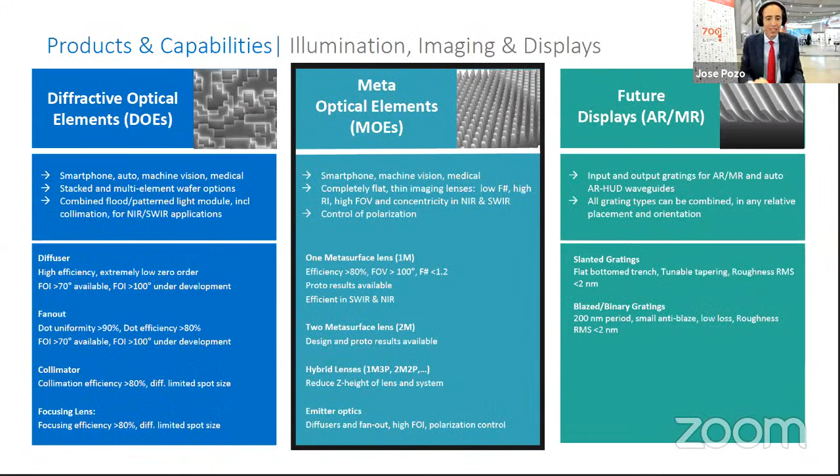Hello, I don't think we can hear you. Sorry for the delay here. Thank you for the introduction. So NIL Technology have 3 different product categories. We have the diffractive optical elements, we have the meta optical elements, and the future displays. And today I will talk about the meta optics.

So what is it that is exciting about meta optics? If you think about a classical imaging system, you typically have a lot of different refractive lenses, and you need many lenses in order to make a good imaging system. But with meta lenses, you can do with much fewer elements. It's even possible to make a camera with a single meta lens and a sensor. And this simplifies integration. It's also a very high thermal stability of the meta lenses compared to a refractive lens in glass.

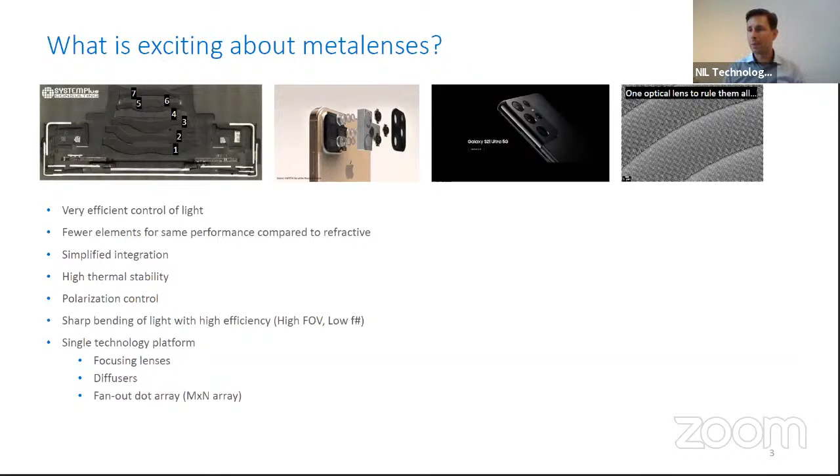With meta lenses, you can also control the polarization, which opens up for making completely new functionalities. A meta lens can completely replace a fisheye lens, so it's possible to make a flat optic that has a field of view that approaches 180 degrees. And all of these different types of metalenses are done on the same platform, so you can make focusing lenses, diffusers, and dot arrays with fan outs on the same technology platform. Here is an example where we have made a camera consisting of a single meta lens and a sensor.

And then we compare it with a 6-piece system, so 6 refractive systems and a sensor, and you can see that the image quality is comparable. So it's quite amazing how much the metalenses can accomplish with a single surface.

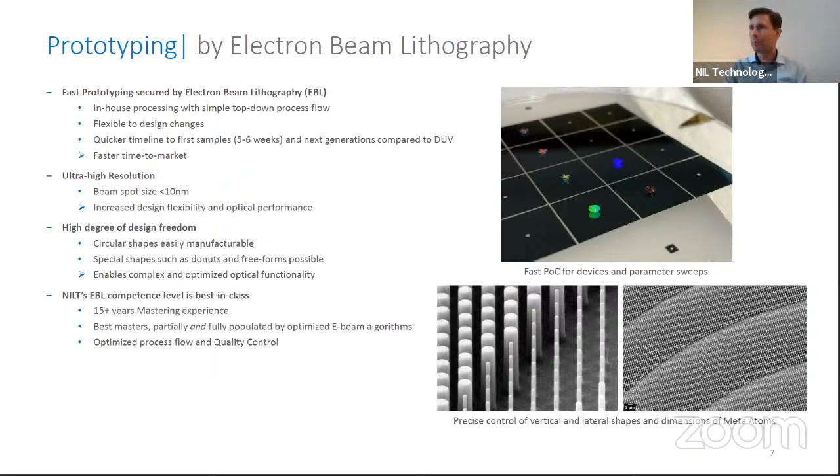For mass production, we utilize the precision of e-beam for making nanoimprint masters. We preserve the accuracy from the master when we replicate it with nanoimprint lithography into a resist layer. After it's imprinted, we do a pattern transfer etch into the silicon, and then we've replicated the metalenses. This process is highly scalable and helps bring down the cost per element. There are no constraints on material composition of substrates or coatings, such as anti-reflective coatings and apertures, and it's possible to reach high efficiencies - we've demonstrated more than 85%, and we're getting better and better.

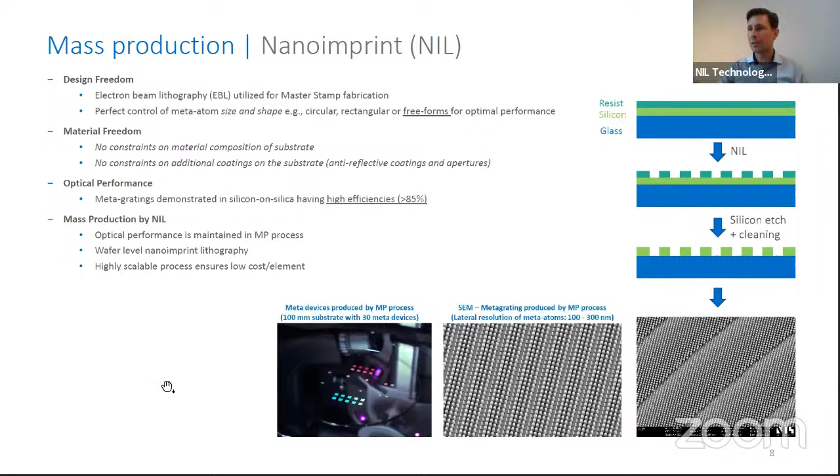The way we work is we start with design, then we have the build, which for the prototyping phase is the e-beam process I described. After the build, we do structural analysis, looking at SEM and AFM to see how the pillars come out, and do statistical analysis. We also look at optical performance, and we can completely link any deviations in manufacturing to the optical performance, meaning we understand how structural deviations affect it. Then we can make corrective actions and tweak the design to improve efficiency or performance, spinning this wheel quickly for prototyping - with a turnaround of around 6 weeks.

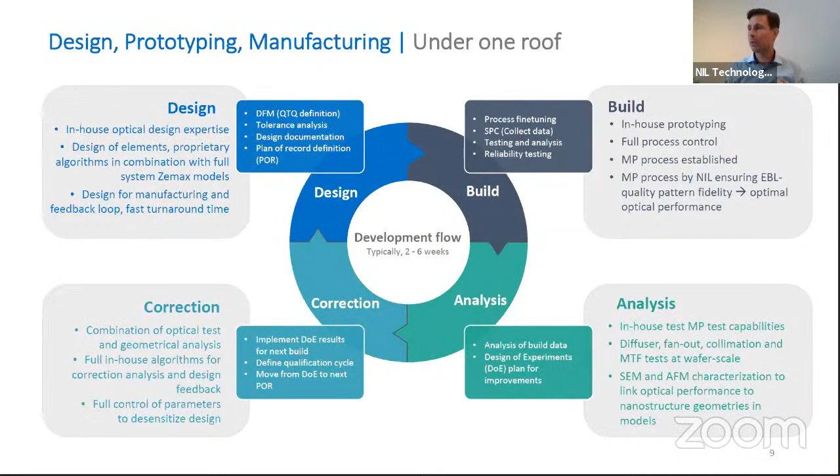Then for the mass production process, we make a fully populated master that we replicate. That is the end of my talk today.

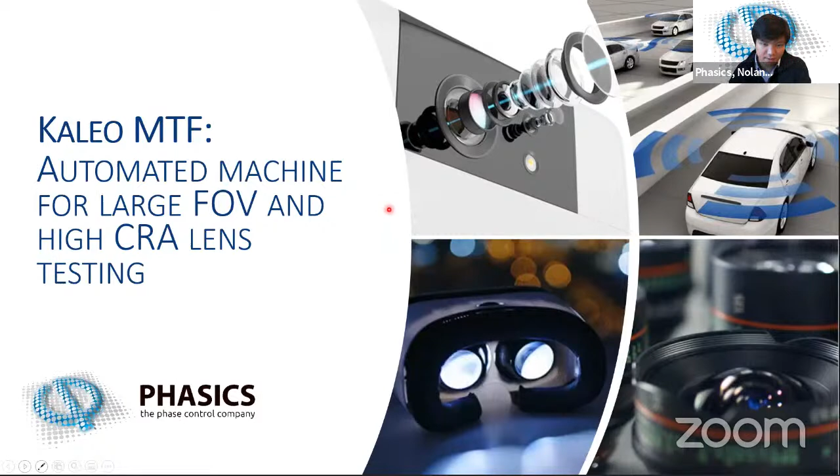Today I will present Kaleo-MTF, actually the new version of Kaleo-MTF, which is our automated machine for high CRA lens testing. But before that, I will go over a couple words about PHASICS. PHASICS is a French company that was established in 2003, with about 40 employees. Our main focus is designing, manufacturing, and supplying high-resolution wavefront measurement equipment from deep UV, so 190 nanometers, to 14 microns. All our main products are based on one technology called quadri-wave lateral shearing interferometry, which is a specific wavefront measurement technique.

So here we have an example, actually a quick overview of the different products we have. We start with the core of all our products, which is the wavefront sensor and the wavefront sensor technology. We have two examples here: one is a visible wavefront sensor with high resolution, and another one specific to microscopy imaging, which we can use a lot for meta-lens characterization. Just to give you an idea, our typical products can reach up to about 800 by 700 measurement points on the phase map.

To make a measurement, we also developed accessories to couple with the wavefront sensors, like here, which is an R-Cube illumination module, so that we can provide everything from the wavefront sensor to the source, to have a high quality beam that can go through your optics, and then we use our sensors to analyze what is transmitted. We also have, for more integration, different accessories to couple with these elements: the wavefront sensor, the R-Cube module, optomechanics, and different optics to shape the beam that goes out of the R-Cube. That can be converging, diverging, or a really large and high quality collimated beam.

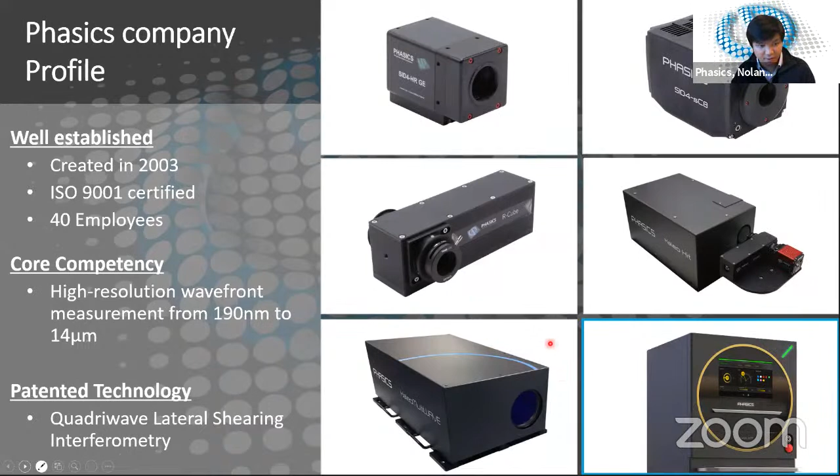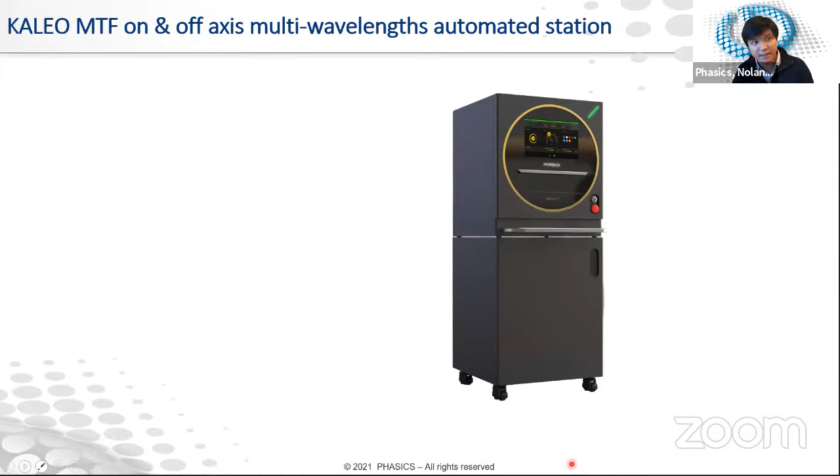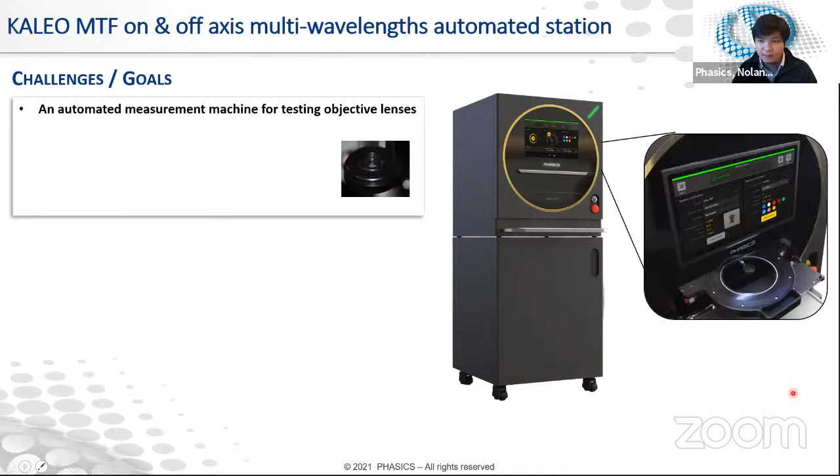What I will focus on today is Kaleo-MTF, which looks like that, and also like that in full size. The idea of Kaleo-MTF is to characterize objective lenses, so imaging optics, automatically. What kind of optics do we measure? They're actually quite small, as you can see the actual scale here. It can be smartphone lenses, automotive lenses for autonomous cars, meta-lenses, or more specific lenses.

The idea is really for us to measure high-end and high-performance lenses, because typically what we have now, as was mentioned just a few minutes ago, the devices are going smaller, and smaller means more CRA, so higher angles to aim for the edges of the sensor. You have high NA for more resolution and more pixels for better images. You have a wider field of view to see more with fewer devices. And something that has been quite a headache for recent developments is nonlinear CRA evolution, distortion, etc. across the field that can be hard to measure. We really focused our development on these hard-to-measure lenses.

So what do we do exactly for these lenses? We measure, for up to 8 different wavelengths in the visible and near infrared, different parameters: the OPD, which is directly the wavefront information, the optical aberrations, the MTF, which is the imaging quality, and some geometric parameters like EFL, F number, field curvature, etc. The idea of the whole system is to give as much information as you can with a single machine and a single measurement.

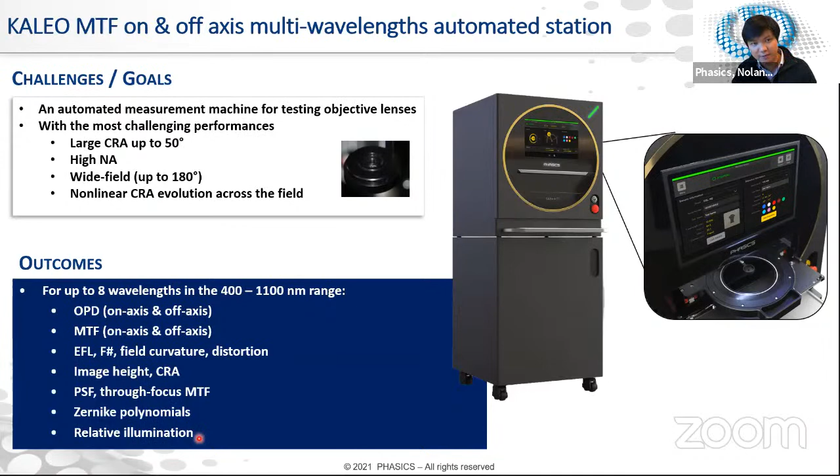The specificities of our machine is really to have a fast and fully automated measurement process, a quick setup with no alignment. You simply need to place the sample inside and you will have all the measurement.

You can customize the measurement sequence. You can choose the wavelengths, the angles, the azimuths that you want. All the results are basically in wavefront, and we can change the plane where we analyze the wavefront, so you can really compare to the design that you have. And we, of course, have accurate and reproducible measurements.

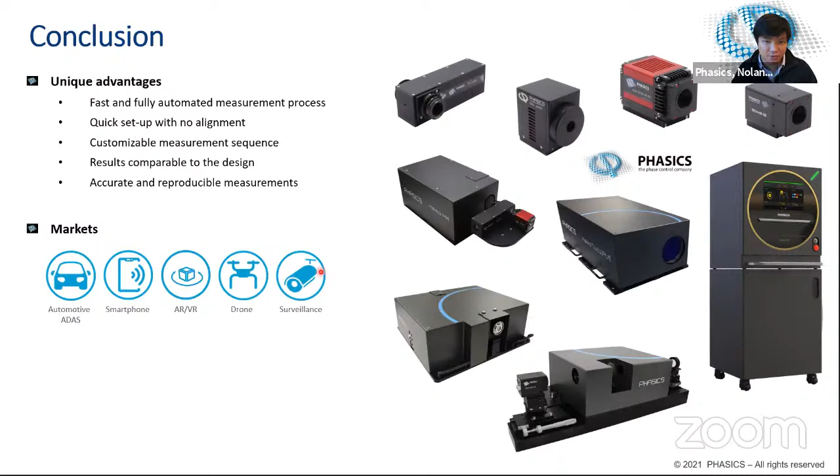As I mentioned, we aim for really high-end and high-performance lenses. These are typically used in automotive, smartphone, augmented and virtual reality. We also aim later on for drone and surveillance applications.

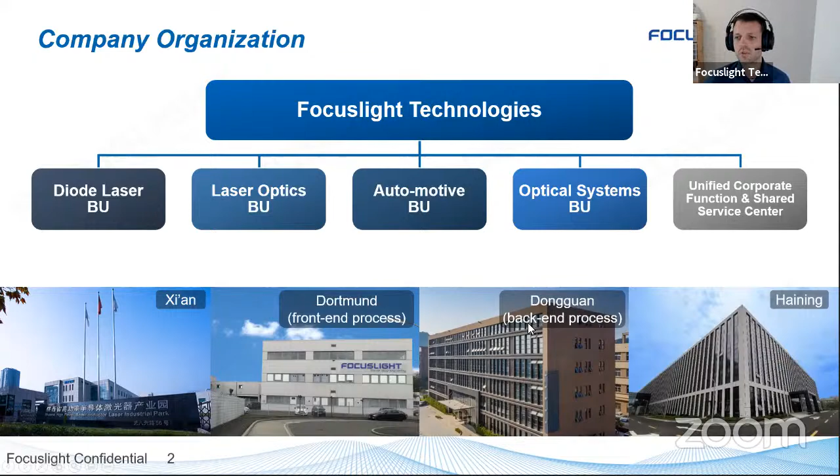We do a lot of things: photon generation, photon control, photonic application solutions. The core of the laser business unit is photon control. We do simulation and production of high precision optics, using our unique high precision 2D freeform process, which allows us to put acylindrical and cylindrical structures into different materials. The production is wafer based, meaning we can produce on wafers up to 300 by 300 millimeters, enabling high volume at low cost.

Both wafer sides are individually addressable, which means you can yield monolithic solutions. For example, on the right side you can see a single piece of optic which allows a half bar to be coupled directly into a fiber, instead of using an FAC, an SAC, and one or two lenses to couple it into a fiber. That's one point which is very interesting for laser manufacturers, which we are as well.

Our materials range from UV to mid-infrared, so we can supply the whole range. We can process calcium fluoride, fused silica, as well as high index materials and silicon. We offer FACs, SACs, wide angle diffusers, and a lot of other optics. You have a standard portfolio to pick from, as well as customized solutions.

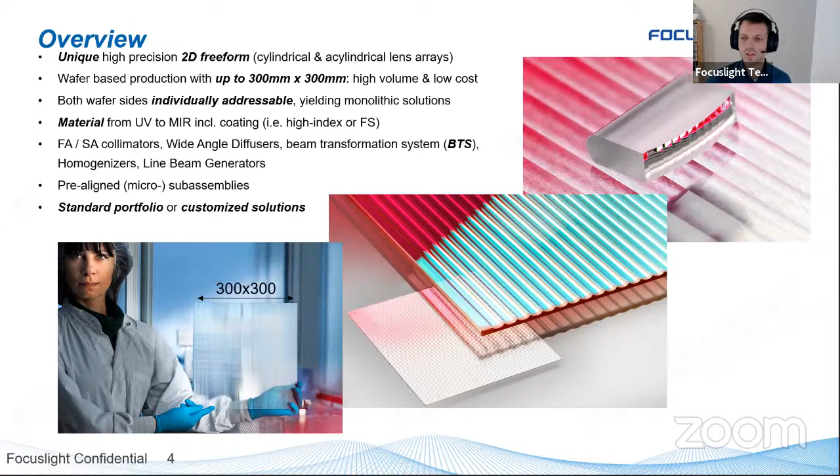The residual divergence always depends on what kind of source you are using. So I stated here just the residual divergences you get from a common nanostack, as well as some products that are fitting, depending on the length, to the 4-channel or 8-channel nanostack, which is commonly used in automotive LiDAR applications.

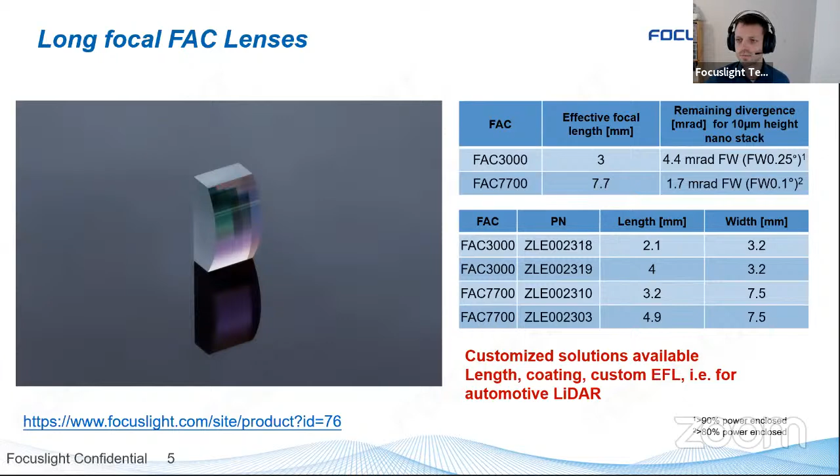But for such applications, you can also use wide angle diffusers. We offer diffusers which are spanning lines, and two of them can span a rectangular field of view. This field can be asymmetric or symmetric in the power inside the field. So we have 100% control on where the power has to be for our customers.

Besides the 120 degree, we recently published the 160 degree. So we can create every field of view up to 160 degrees. You can get top hat profiles, batwing profiles, asymmetric shapes of profiles. Depending on your use case, we can design the exact diffuser you need and the field of view you need.

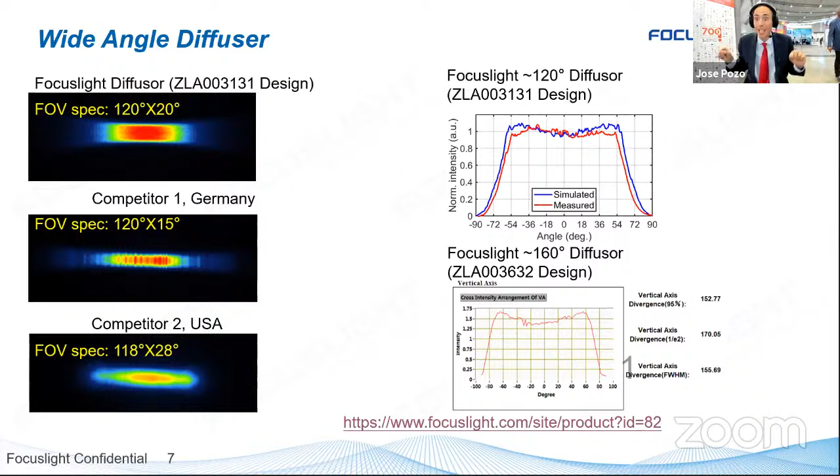Since we are a big group, we can do a lot. I'll focus a little bit on the laser optics business unit, or maybe the automotive business unit, since they are connected in this field. What we can do is help our customers get the exact right optic that they need. We want to collaborate on solutions, not only on optics, but create solutions fitting their use case. This can mean we provide the product together with the automotive business unit, or provide the exact optics needed for spanning the right field of view, asymmetric shapes, or the right lenses for your use case.

What they can do for us would be the next thing. We are always interested in improving, in being at the top on our metrology capabilities. I was hearing already with interest about PHASICS - I probably will contact you afterwards. I want to reach out to you, but I also saw some other interesting possible collaborations, since there are other companies developing new capabilities, new possibilities in creating optics, like Glassomer. So thank you very much, because I want to do that exactly. So PHASICS, we also have Imagine Optic, we have Mountain Photonics - they can help you with the metrology challenges, and Nolan is going to contact you offline.

About 3 years ago, we started designing and building components for the datacom market into the 5G, as well as the intra-DCI market for tunable lasers in the coherent space. We're working with customers for the 400G space. What I'd like to talk about today is really a couple of products, especially one product in the 400G space.

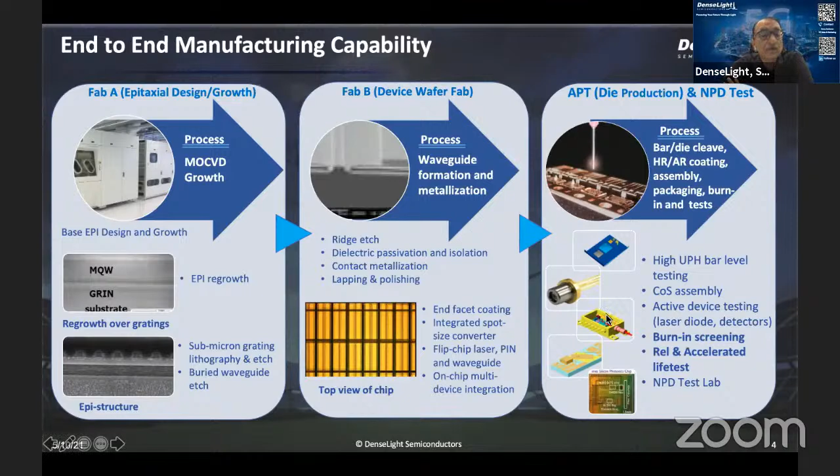We have the capability to design and grow our own wafers, and we do end-to-end manufacturing. We have our own epi reactors, the ability to fabricate our own devices, cleave, coat, and test, as well as burn in. The first product I'd like to introduce is the 70 milliwatt, 75C continuous wave DFB laser.

What's interesting about this laser is that it's a BH, buried heterostructure, and it's non-aluminum containing. The reason is that we've had several customers come to us and say they wanted high temperature performance, but without aluminum. The feedback is that aluminum tends to degrade material performance over long periods. So we engaged with some key customers, designed and fabricated these devices in our fab in Singapore.

We have all 4 CWDM wavelengths. The key thing is that this chip is customizable to fit into a silicon photonics platform. In fact, some time back we announced a partnership with AMF, one of the silicon foundries, where we are developing a rule of engagement, if you will, where if a customer wants to do a specific engine on a silicon photonics platform, they could come to us with a light source and we'd be able to customize the design very easily.

We do have non-hermetic coating options available. We have reliability data up to 2K hours, which we can share with you if interested, and we are able to sample now. The key application is really data center interconnects, specifically we want to start off with DR4 500-meter application. If any customers out there are designing this, we'd be very interested in talking to you.

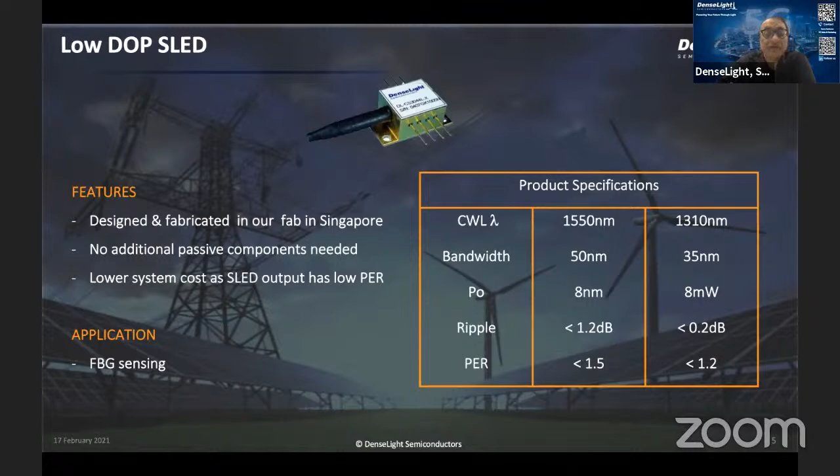You don't need additional passive components to confirm the degree of polarization, which gives you lower system cost because you reduce or don't have additional components. Our focus really is in FBG sensing. Thank you for listening — these are the two products I wanted to talk about today.

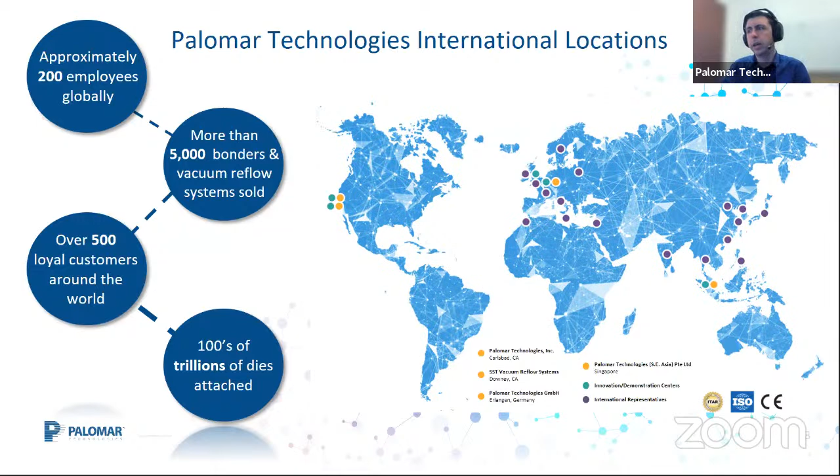At Palomar Technologies, we supply not only packaging equipment, which I'll go over in a second, but we also have our innovation centers positioned globally to help EPIC members essentially work through process development or low volume manufacturing. As I mentioned, we have a global presence, with main facilities in Germany, in the UK, in San Diego, and in Singapore. As far as what specifically we offer, we offer die attach machines, wire bonding machines, and vacuum reflow systems.

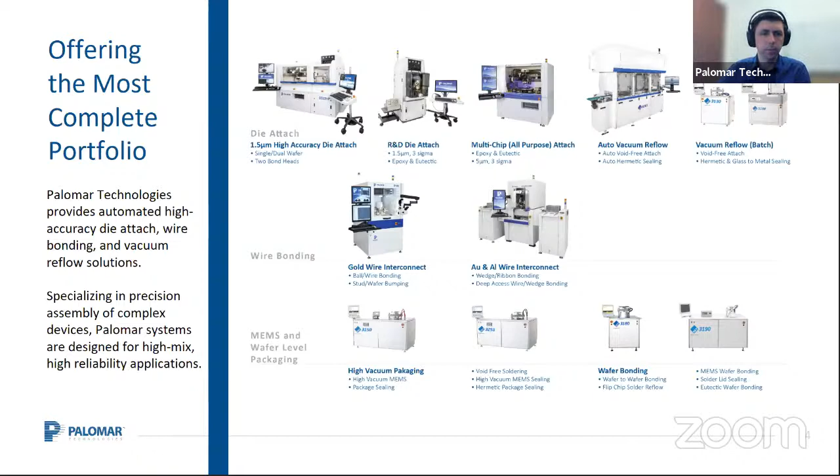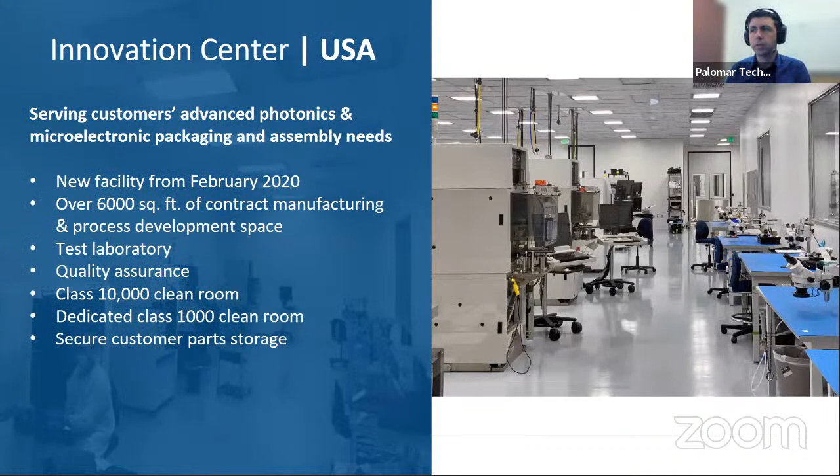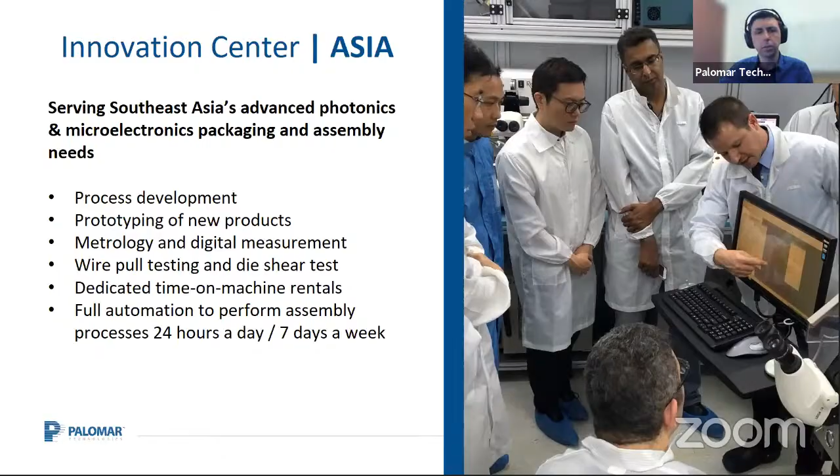Talking about the innovation centers briefly, what we can do there is work with customers to prototype or work through process development of any new products that they have, and get them a jump start into their new products. So our first innovation center we have is in the US, over here in San Diego. We also have one, as I mentioned, in Singapore, where we have testing and manufacturing equipment, so we can both build assemblies and test them. We have another innovation center in the UK at the other EPIC, and we also have a presence in the Fraunhofer Institute, where we can also do some low volume manufacturing and prototyping.

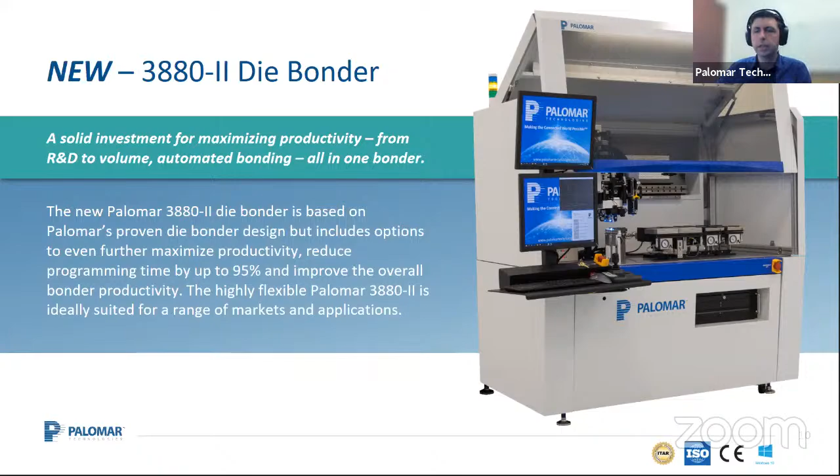Now going to the new product that we released just a couple weeks ago, it's our next iteration of our die bonder, the 3880-2. It is able to do epoxy die bonding, eutectic die bonding, flip chip, and really its key quality is that it is highly flexible and very quick to program and get up and running. So it's ideally suited for customers who are looking to have a machine for R&D, but it's also scalable to go to automated production and can be outfitted with conveyors and magazine handlers for full-scale manufacturing.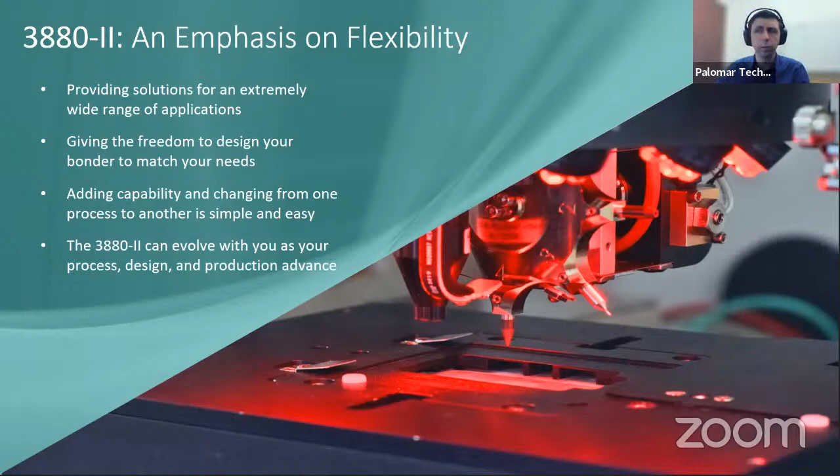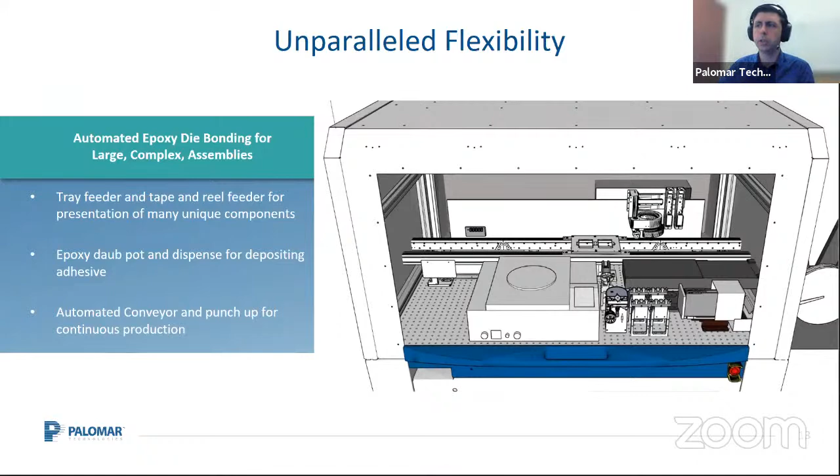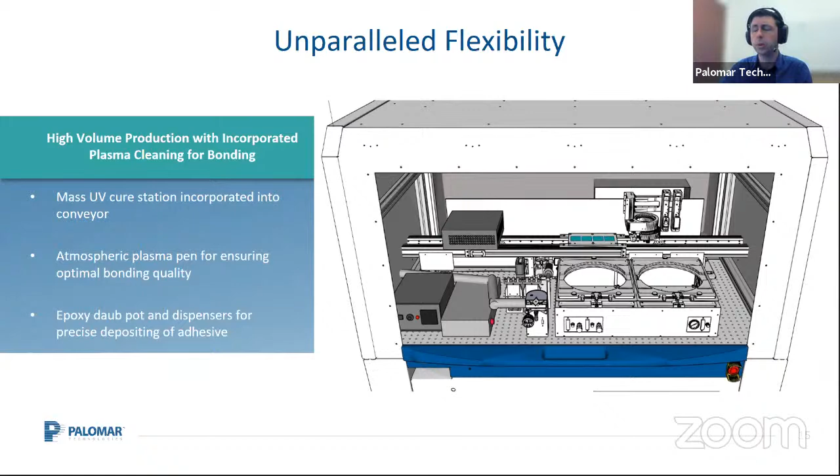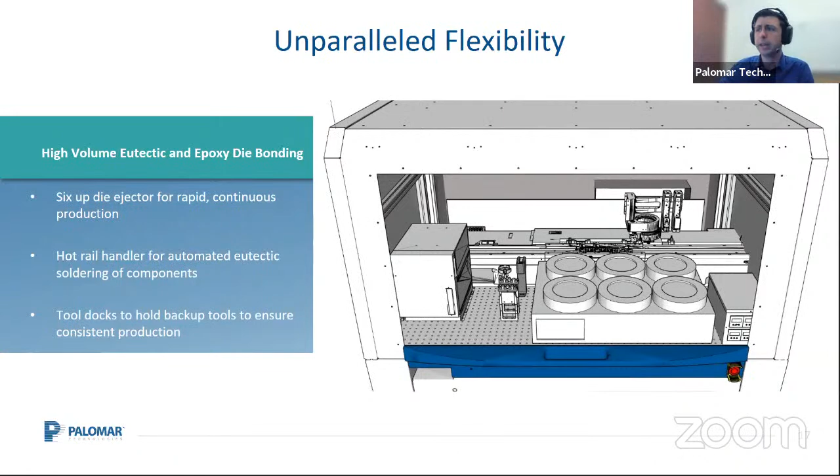To kind of show some of the breadth of the flexibility of the system, here's some mock-ups of our work envelope. So you can fill it with general stages, maybe a die ejector and a conveyor, tape and reel feeder. You can have pulse heated stages or custom UV stages. We can also integrate things such as an atmospheric plasma cleaning pen, so you can plasma clean the bottom side of die before you go ahead and bond with them. We have dispense capabilities, pin transfer for epoxy stamping. We have other variations of die ejectors, so you can go to larger volumes, a heated conveyor, flippers for flipping die that are presented, so that way you can do flip chip.

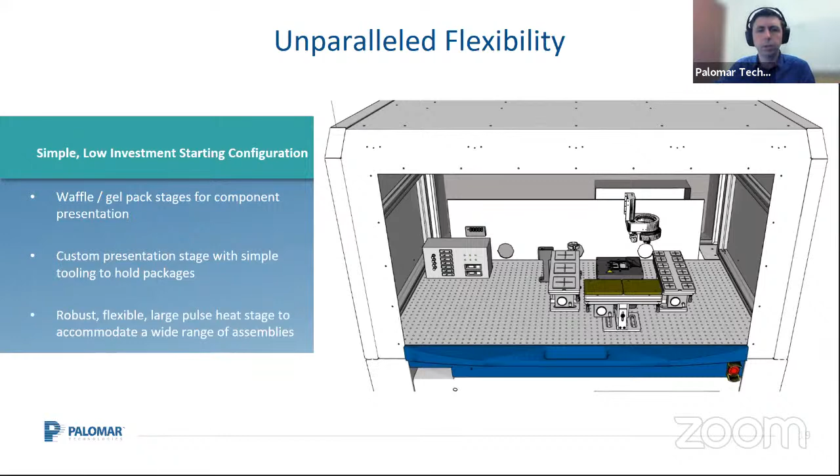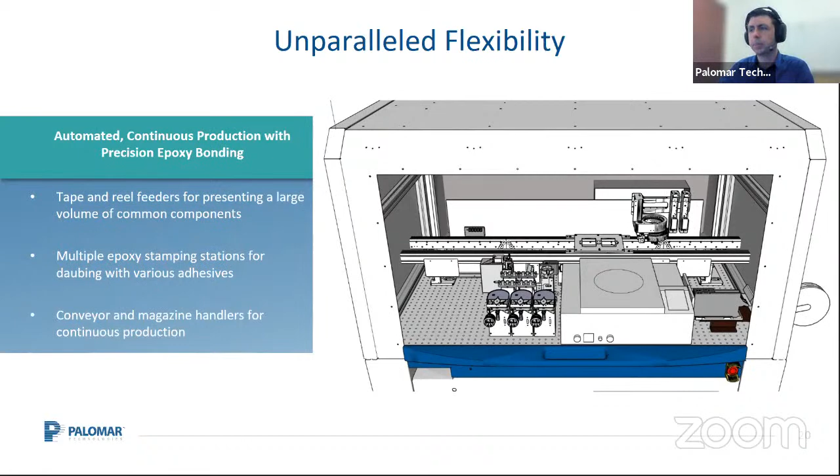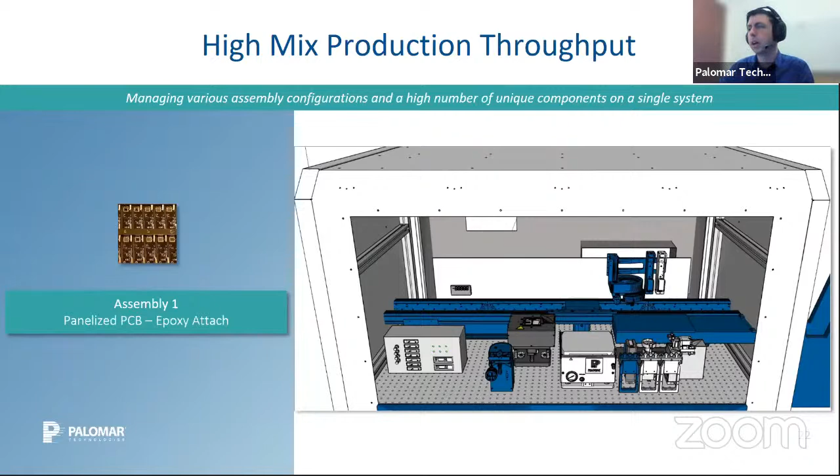We can also do much smaller layouts if you don't need every piece of equipment. So essentially it's customizable to whatever a customer may need for their applications and whatever types of processing equipment that they need. And then once you design or set up your workspace for what you need, you can use it for multiple assemblies if you need to. So for instance, here's a particular setup, and it can be used for various different assemblies.

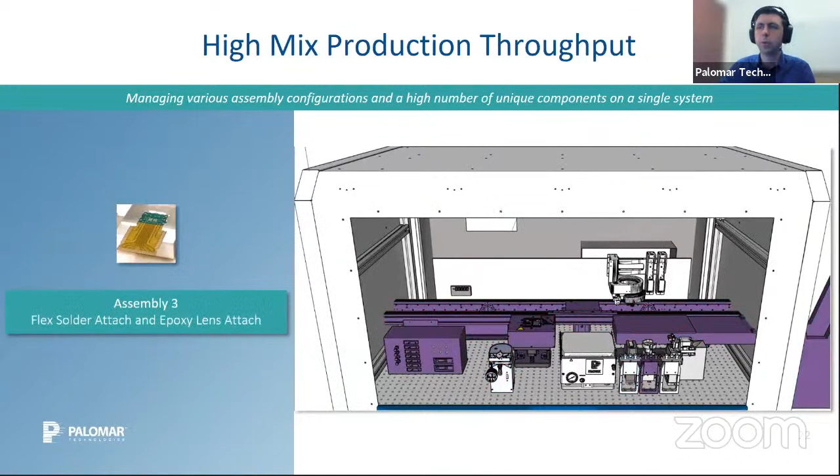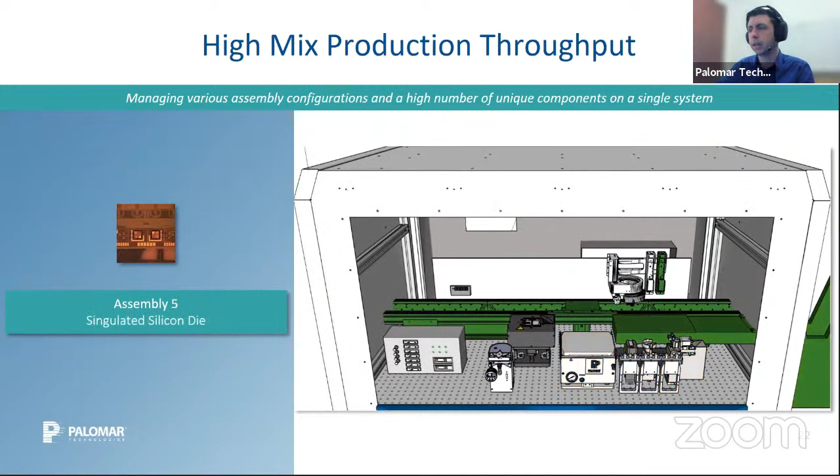So I'm just going to cycle through some of the different pieces of equipment that are lighting up for various applications. Definitely flexibility is the key focus for our die bonding technology, because we want to be there for not just your first application, but every application after that.

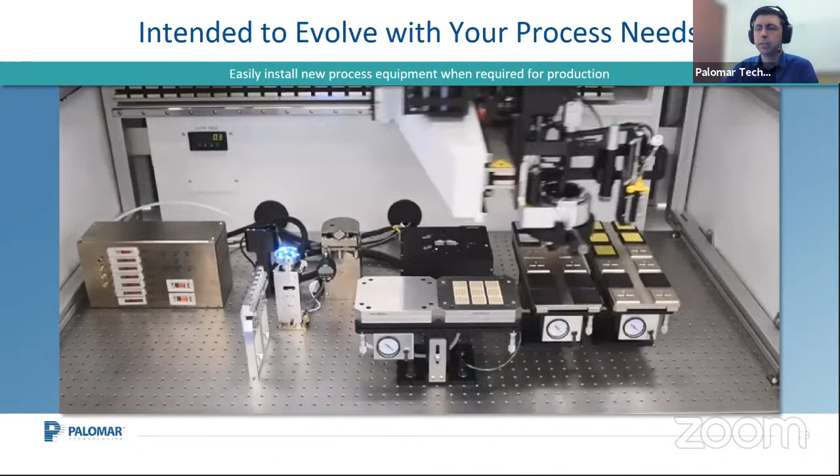To show a little more in terms of scalability, this is a short clip showing the bonder in action and how it can continue to scale up over time. You can start with a relatively low investment, add in some automation such as a conveyor, and then go to die ejectors and continue for whatever you need.

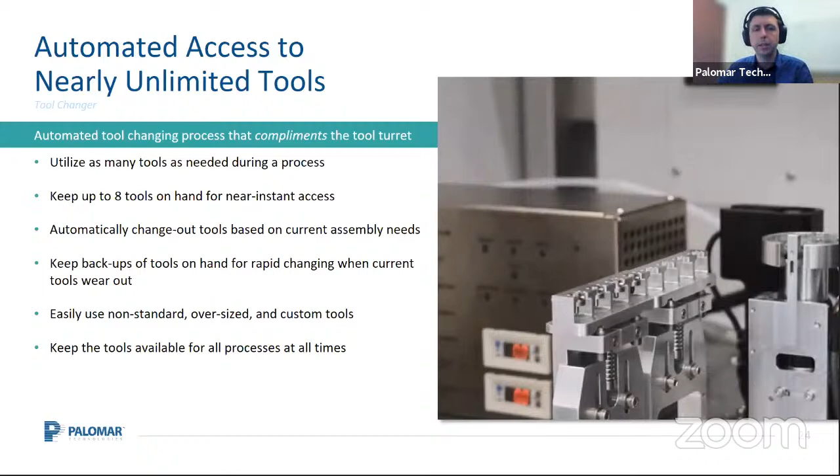Now to jump into the newest technology we brought into this machine, our tool changer. We've long used a tool turret which can hold 8 vacuum pick tools for manipulating components. Now we have the ability to store extra tools on the work envelope, load them into the tool turret, and move on. This is all automated through the build process, so it can continue autonomously building. Once you switch over to a different set of products, it can switch out the tools that are being used for tools needed for that application.

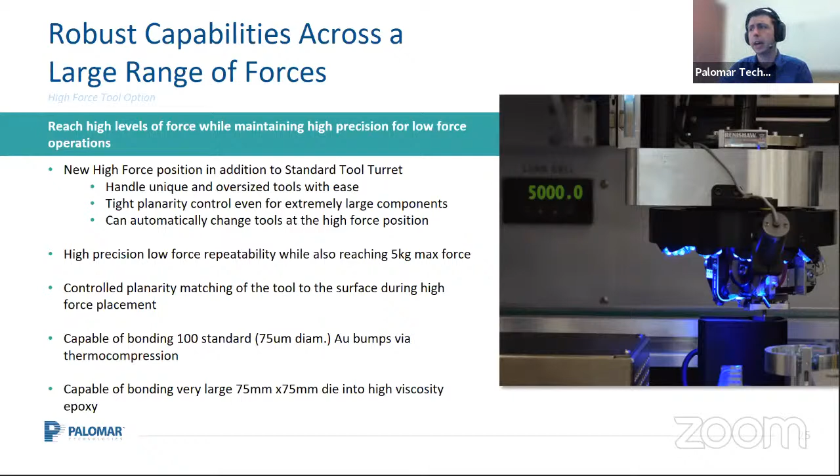We also have the new high force position, which can go up to 5 kilograms, useful for thermocompression bonding or any type of epoxy bonding with large components that need higher force. It's also a lot more robust and repeatable of a position.

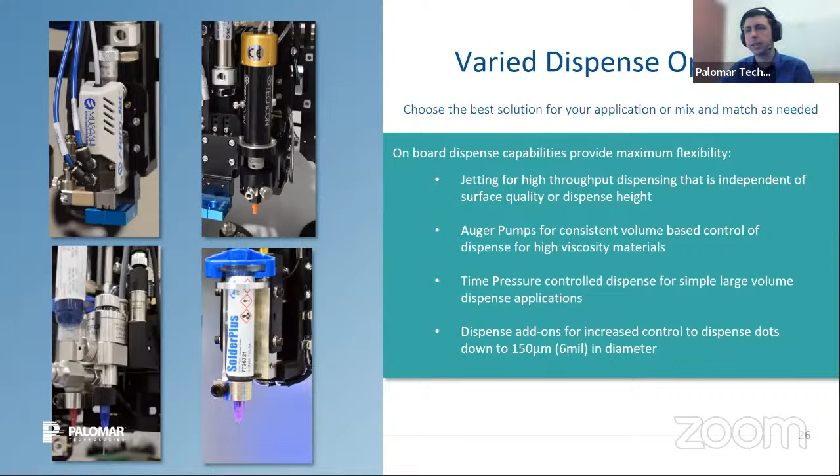To go over a couple other options to round out the machine - there's a lot to talk about, but I'm just trying to hit the high points. We offer various dispensing capabilities: jetting dispense, auger pump, time pressure, specialized dispensers that can dispense all the way down to 150 micron diameter dots.

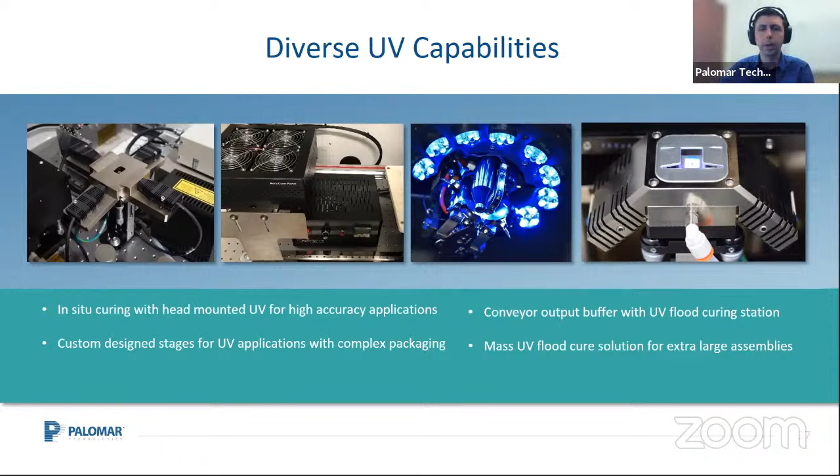We also offer diverse UV capabilities: custom UV stages, a large flood cure UV that can move over to a conveyor or another area in the workspace, UV on the bond head. We also offer heating solutions - a localized pulse heated tool, heated conveyor, a precision pulse heat stage, and a standard pulse heat stage. And I mentioned custom option integrations such as the plasma cleaning solution.

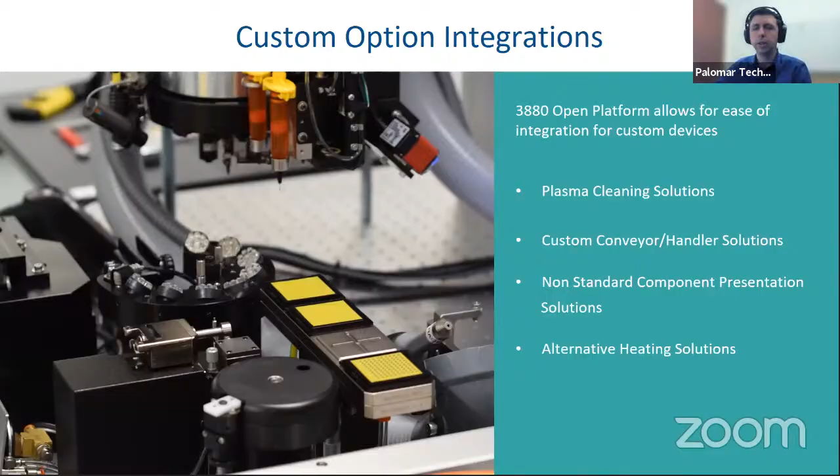And that's everything. Well, that's not everything, but that's as much as I can cover in 5 minutes.

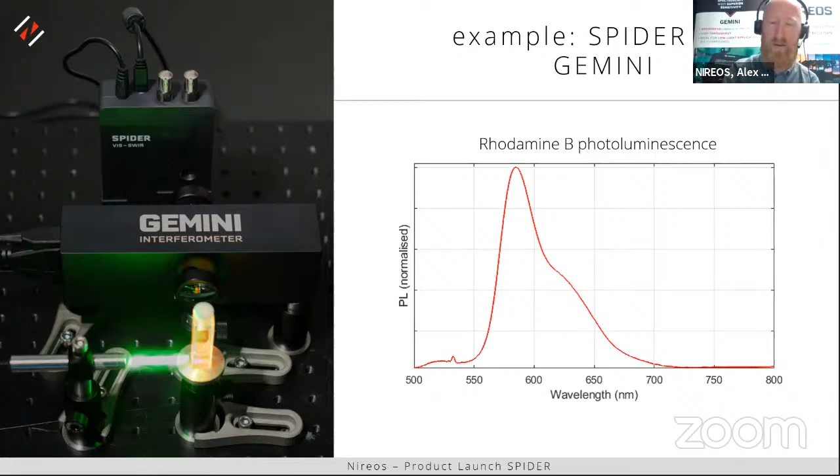Contrary to what this photo may look like, the laser is not intense enough to rip through space and time. It's a fairly weak amount of light that we're measuring here, but we're able to recover a very accurate spectrum from the rhodamine.

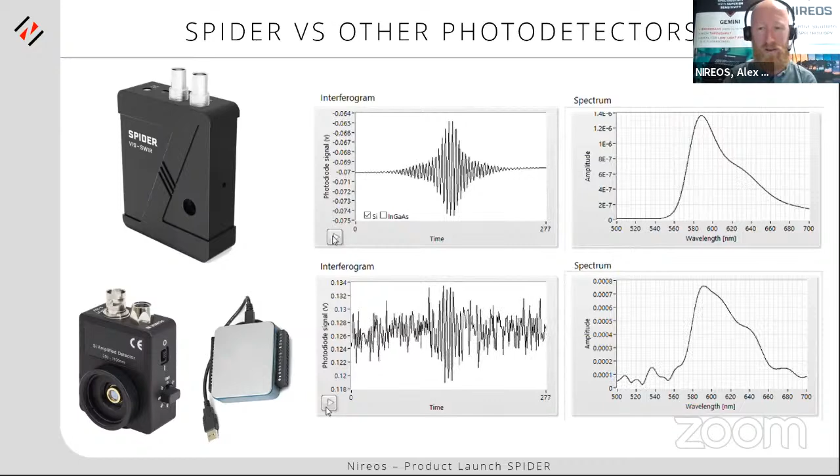In fact, to really show it, I'm going to compare to the solution we would have used before, which is a commercially available amplified photodetector with a 16-bit DAQ. Here you can see in real time the two instruments running, Spider on top, and the decreased noise level and increased sensitivity really makes for an incredible difference in the data we're able to measure. So you see the result there.

Furthermore, because it's so broadband, we can measure in a single measurement a huge spectrum. This is just the fluorescent lights in the room I'm sitting in right now, and in one measurement we get all the way across 3 octaves of wavelength from 400 to 1700 nanometers, without any of the problems you might have from a grating spectrometer, like second order diffraction or having to use a series of filters. It's super convenient, super simple to use, and we're hoping people can find a use for it.

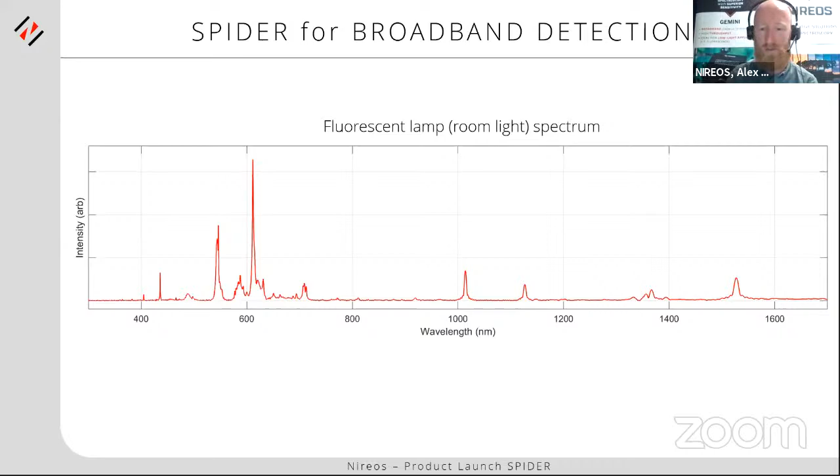We have here a photodiode with the electronics, and you are looking for strategic partnerships for it to be implemented in systems. 750 companies, they want to help you. Which are your target companies for them to connect with you? What can you do for them? What can they do for you?

Yeah, well, really, we developed this for the specific application in mind, and it's clear to me how it's good for that application, but I'm sure it's such a useful little tool that isn't out there. So basically anyone that wants to measure light accurately and save themselves the time of developing this really simple but elegant little product, those are the people I'm looking for, people that would make use of this.

Very good. At the end of the day, one thing that for me I'm quite amazed about is that NIREOS, in the past we have talked to you about the camera manufacturing business, where you have the Gemini. We also have talked to you about the shortwave infrared area, the hyperspectral. This is one of your secrets in the sauce. This is the way that you actually make accurate detection of light, and you want to cooperate with other camera manufacturers. I believe that many of them are going to be in touch with you after this presentation, because I can tell you to everyone I have talked to, NIREOS, I endorse this product. This is something really, really big, and that has made a difference in the way that NIREOS is now one of the most exciting companies as a camera manufacturer.